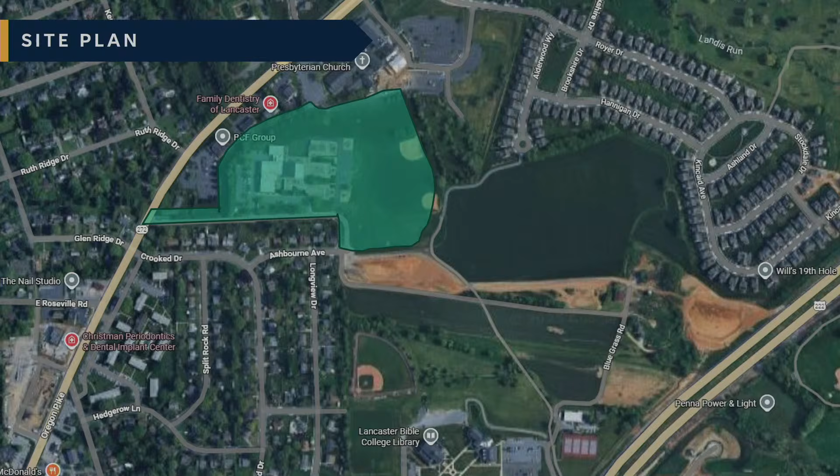Looking at the overall site plan, this is your existing site plan. The green space to the right, to the east, is your playground area and your fields. With the building itself, the three wings to the right are the majority of your classrooms. The three big boxes to the left are your gymnasium, auditorium, and cafeteria. In between is a mixture of classroom spaces and auditorium support spaces. You have your bus drop-off out front to the south, which is where your main entry is, and a car drop-off to the left of the existing building. So just orienting everybody quickly to the existing building plan before we go into the options.

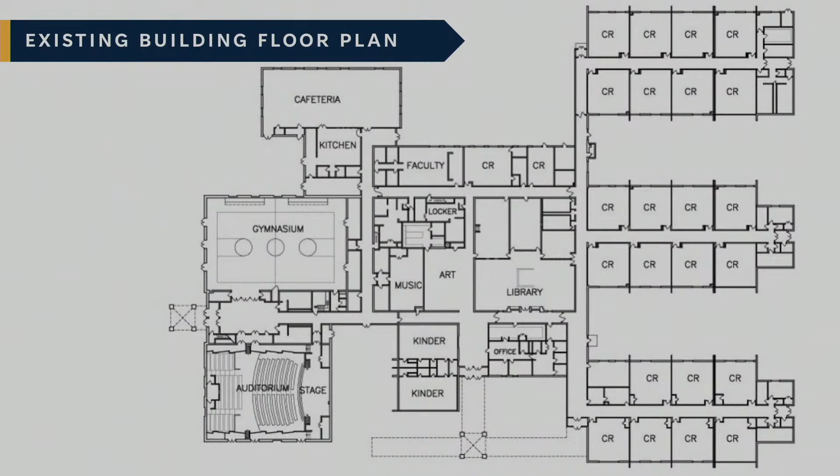Have you all seen the existing building plan option before? Previously we showed three options at the January 8th Facility Committee meeting and at the Town Hall: the addition and renovation option A, the addition and renovation option B, and the new option. So we are going to run through those updates with you tonight.

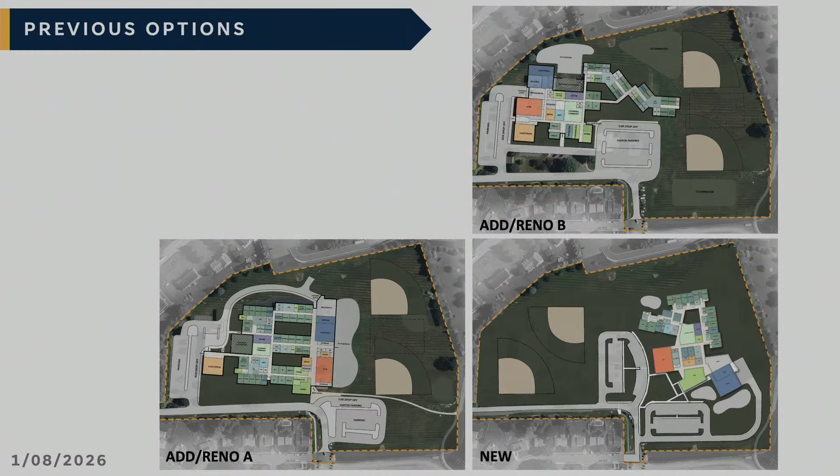So option A is the exact same as you had seen the last time. High level, just to review it with you: with option A, we are separating the car drop-off and the bus drop-off. The bus drop-off is going to be on the left, and the car drop-off is going to be on the lower right. Hold on here.

What that blue line indicates on that plan is where the new addition is versus the existing building. The dashed blue line that goes straight up and down on the page, to the right is new, and to the left is existing classrooms, and then we have two additions out beyond that. The intent of option A was to get the large box spaces that needed to be closer to the playground and the ball fields over on that side of the building.

Getting into this a little bit more in depth, we'll go to the floor plan in a second. This option is the only one-story option that we're conceiving tonight. We have an option B, which is a partial two-story building, and then the new option is a two-story building. This option maintains the auditorium. Although we have moved the cafeteria and gymnasium to the right side, we have kept the auditorium in its current place in this option.

So looking at the overall floor plan, what you're going to see with the yellowish orange dotted line on the right and the red triangle below that, that is the main entry coming into the building. This is your public area of the building. We tried to move the gymnasium and the cafeteria, the often shared spaces with the public, adjacent to the playgrounds and the playfields outside. Directly inside the door, we have the administration, counseling just around the corner and connected, and the nurse, which would be close to both the gymnasium and the playfield and playground.

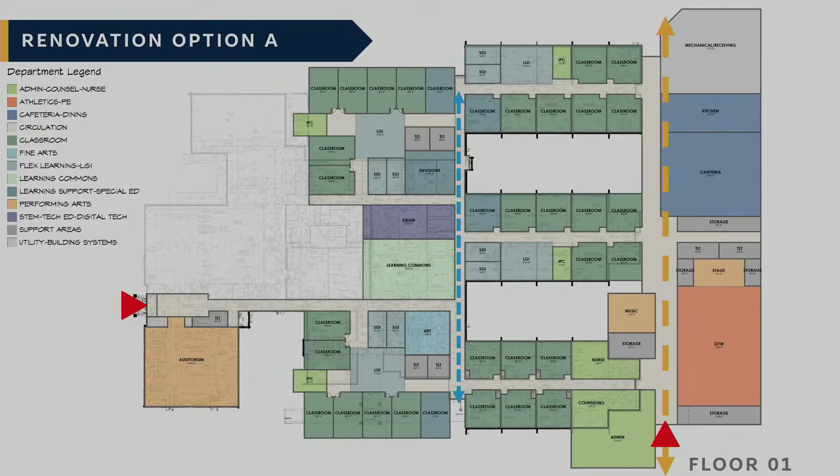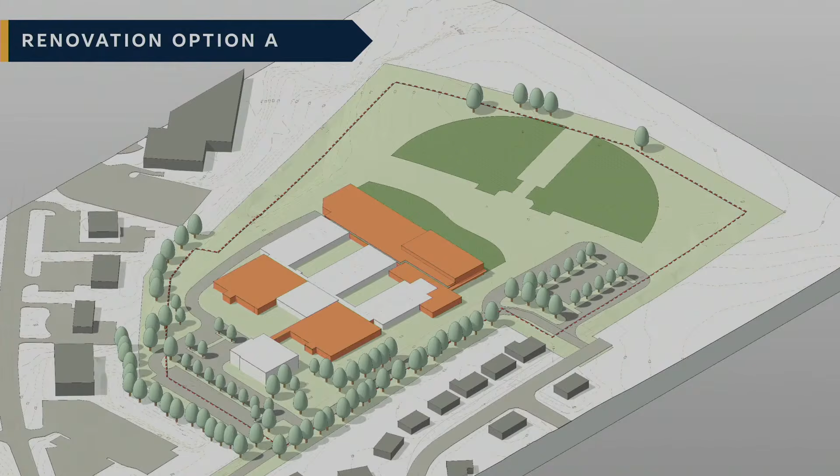Just looking at this from the aerial view, the orange is the new construction, the white is the renovated areas, so you can see that at a high level. The other part we want to talk about with these options is a schedule to get through design and construction.

The important part of this is because of your driveway that connects to Oregon Pike, and because of the work being done here increasing capacity, you're going to have to improve that intersection. That involves PennDOT, so that is going to be the time driver for this design and permitting schedule. Otherwise, you could probably get through this 6 months faster.

So we contemplated two different things: one, can we move the students out of the school to another place while this is being done? Or if that doesn't work, have temporary trailers to move students into. Both of those options did not work. There's additional cost to the construction number you're going to see at the end to make that work on this option, so this is not a highly desirable option because of the complication of getting through construction.

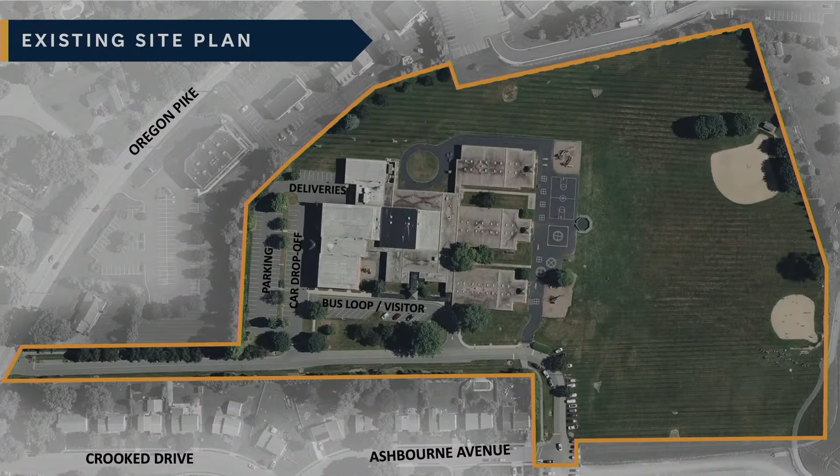Mr. Blayton will now discuss the additions and renovations option, option B. This one has been updated since the last time you saw it.

Thank you. All right, so as Chris said, we are going to discuss option B, and hopefully the first thing you see is that this looks nothing like, or not very much like, the option B you saw last time. There are some commonalities, right? But last time we looked at option B, this is the next iteration.

The last scheme had a classroom wing that was 2 stories, had 4 grades in it, but kind of snaked around the north side of the building to avoid those classroom wings, as Chris just discussed, so you could have students being educated in your existing facility while those new classrooms were built. But we agreed, as we approached the town hall, that even that wing kind of spread things out throughout the site for a 2-story scheme, right?

So we went back to the drawing board, as it were, to see where else we could place a 2-story classroom wing on the site. We looked at the existing roadway going in from Oregon Pike as part of your property, and as you approach the building, there's the existing bus drop off out front where your main entrance is. The more we looked at it, we wanted to test what it would look like to place a new 2-story classroom wing there, and that's what you see in this new option B scheme.

By and large, this new wing gets built first and avoids your existing academic spaces as well as most of your existing core spaces. Yes, you would need some temporary provisions, such as a different entrance while this was being built, but any phased construction has those sorts of accommodations to be made. So what you hopefully see in option B is a really nice compact plan. Where option A gave you brand new core facilities, option B gives you brand new academic facilities for your students in 4 grades: first, second, third, and fourth.

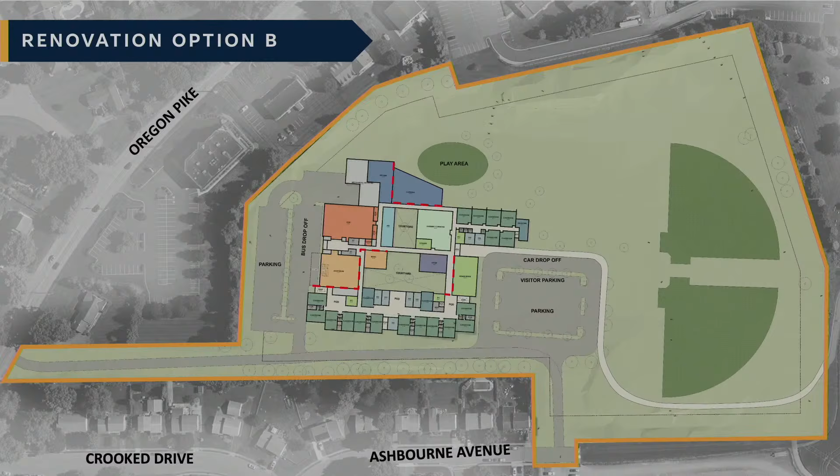That would be like a new wing - it would be fully renovated, with spaces the appropriate size for those programs. Think about your littlest learners being on a first floor adjacent to the entrance, the administration, and those shared core facilities - a really strong placement location. Now, there are some areas that are existing to remain, which we'll look at - you'll be able to see that on the 3-dimensional slide at the end of this presentation.

So this is an enlargement of that first floor plan. As Chris said, option A was the only 1-story scheme, but by virtue of this classroom wing, this is a 2-story scheme. That new wing provides spaces for 2 grades per floor with 2 learning communities or neighborhoods at either end of the wing, coming together in a common area in the middle. That's all located south of the common areas of the building.

This scheme also maintains the existing auditorium, the existing right-sized gymnasium, and learning common spaces. It does provide, as I said a moment ago, the new administration and front entrance to the building, but that also works in some areas such as courtyards into the existing floor plan through some selective demolition as the project would move on.

Plan north, we see those dark blue areas - that would be a reimagined, reconfigured kitchen and mechanical room, and then a new student dining area in that triangular piece on the plan north side. Again, that has adjacency to the courtyard to the south. Same with the learning commons, same with your STEAM classroom with the other courtyard and art spaces. So you get a lot of opportunities to activate those courtyards with programs from those adjacent spaces in the plan.

While it's not shown in the estimate we're looking at tonight, we do have some dashed lines that, should this particular option be forwarded, show opportunities with the clear areas on the site to expand the auditorium seating capacity, should that be a desire of the district or yourselves. But what you see colored in on the plan is what is incorporated into the estimates you're seeing this evening.

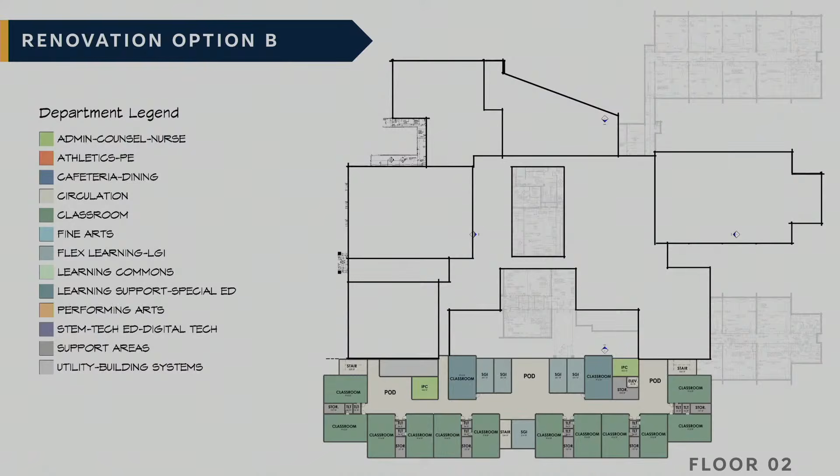Last but not least, we'll look at the massing on the site, similar to Option A. In orange shows the new additions occurring on the plan, and the white boxes show the existing portions of the building that do remain. This would be a phased construction project, with the new two-story classroom wings being constructed first to facilitate the moves of students.

Before I move on to the schedule, are there any questions regarding the plan or the site plan? Yes, please.

Just a three-letter acronym question: IPC, the little green square? Instructional Planning Center. We're good for putting acronyms on the plans without fully explaining them. So those would be faculty areas throughout the building, so that your educators would not have to go to the office or the library learning commons, for instance, to make copies or collaborate as a team. They have those instructional planning centers, and typically an adult toilet associated with those throughout the plan, just to facilitate their day and their schedules.

Thank you very much. You're welcome. Any other questions? Yeah, Mr. Rivera, I think.

Just a quick question: if I read that correctly, it says that you could potentially add 125 seats to the left of the auditorium. Would that then be able to house the entire student population?

I just want to verify with my team members here. Was that the intention, Justin? Okay. If that didn't happen, is there a place, like a stage in the gym or somewhere else, where all the students would be able to fit?

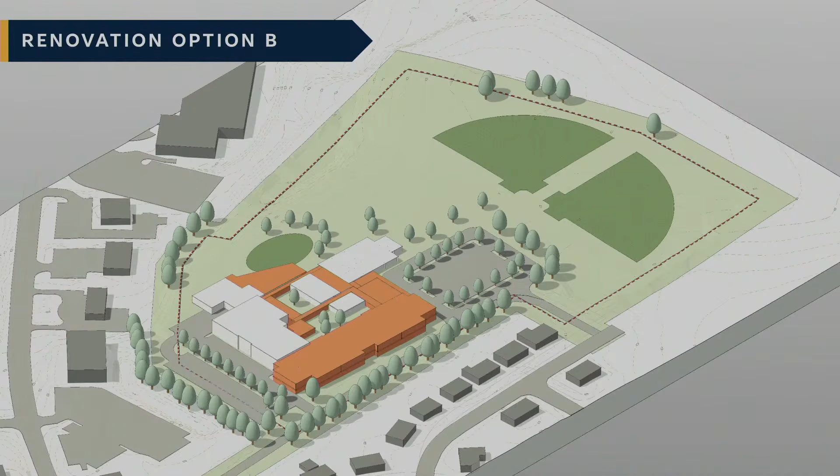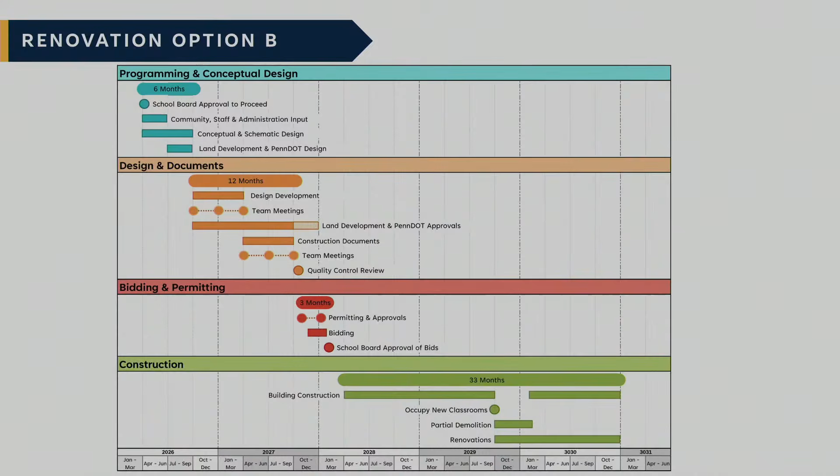So that's how it would potentially look on site, at least from a conceptual level. Should this particular scheme move forward, the schedule in blue, orange, and red is virtually identical to what Chris described with option A. It's really in the green, the construction phase, where there are differences, and that would be that you'd build first the classroom wing, but once that's complete, that's when you have a shift within your student body to those new spaces. Then there are different phases of construction that complete the project.

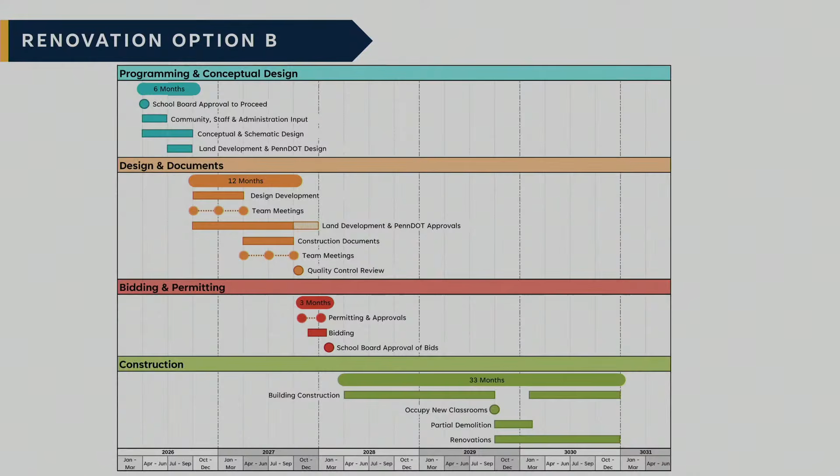Where on option A you saw the necessity for some temporary classroom spaces, with option B you're building those classroom spaces that students then shift to as certain areas of the building are demolished or renovated, giving you a complete holistic project. That's probably the biggest difference between the two from a timeline standpoint. Yes, sir, I just want to clarify that the last phase of the project is not going to take over a century.

Well, it goes from 2029 to 3030 and 3031. So I just wanted to make sure, just so to clarify for our viewing public, that it's not going to take a century. We always say that we are building for the future, sir. We are really good at future planning. Thank you so much for pointing that out. You are obviously 120% correct there. This would all happen within this century. So, thank you.

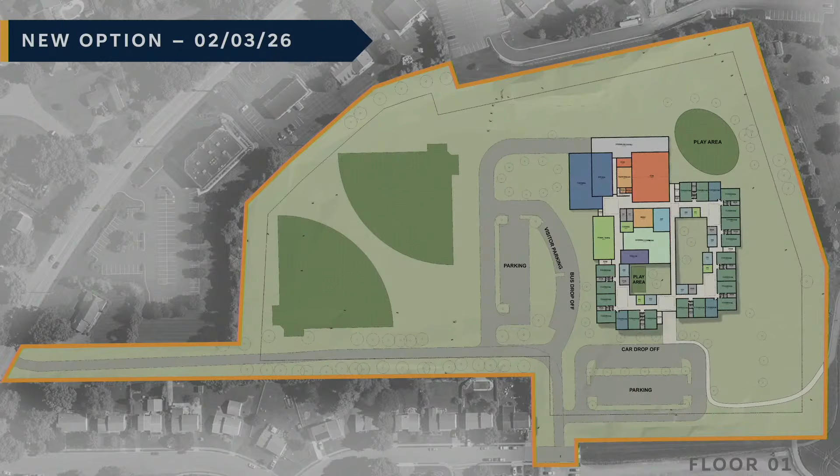Zooming in a little bit closer on the plan, if we start on the left-hand side and work our way to the right, in the middle there is an admin piece where we're nice and center, right off of the bus loop there on the left-hand side. So that would be one of the primary entries to the plan.

To the bottom and wrapping around the right-hand side would be the 3 learning communities here on the first floor, and the opportunity we'll see in a little bit to stack 2 more off of the back side. This will also show the flexibility and additions in the future should the need arise.

But if we look at admin and move directly to the right, that would be your learning commons right in the core of the building, equally accessible from all of the learning communities, tethering that with STEAM as well, and giving them the opportunity to have outdoor space directly adjacent.

If we look a little bit closer at the learning community in the bottom left-hand corner, thinking that could be the littlest learners as well as Envisions. They're adjacent to the admin, but also giving them access to a courtyard that would be private, enclosed, safe, and seem to make some sense as well with that.

We are showing not only an entry on the left-hand side, but if we think about car drop-off on the plan to the bottom, that would be the entrance, and really that spine that we see, that corridor moving up to the right of the learning commons.

Again, making sure that circulation, once you're in the building, it's easy to get where you're going, streamlining students' navigation as well. Using the same color coding, we're seeing the public corridors there, not only behind admin, reaching up to cafeteria, across to the gym, and further towards the first learning community, but then the private corridor as well in the blue.

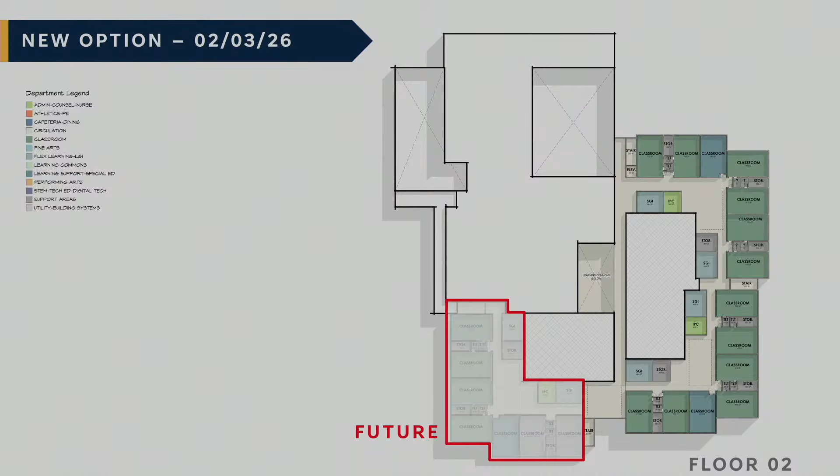Moving up to the second floor, this shows the potential for maybe that future expansion and building that into the project at this point. So we're really only needing 5 of those groupings right now. But if we were to envision that bottom left-hand corner, structuring that in such a way that an addition, although disruptive in the future, gives you the potential of expanding on-site without expanding your footprint out.

And then from a massing standpoint, looking in at the two courtyards in the middle, both serving the learning communities as well as the learning commons, and then showing how the two-story pieces wrap around from the south side as well to the back.

Any questions on this one before we move to schedule?

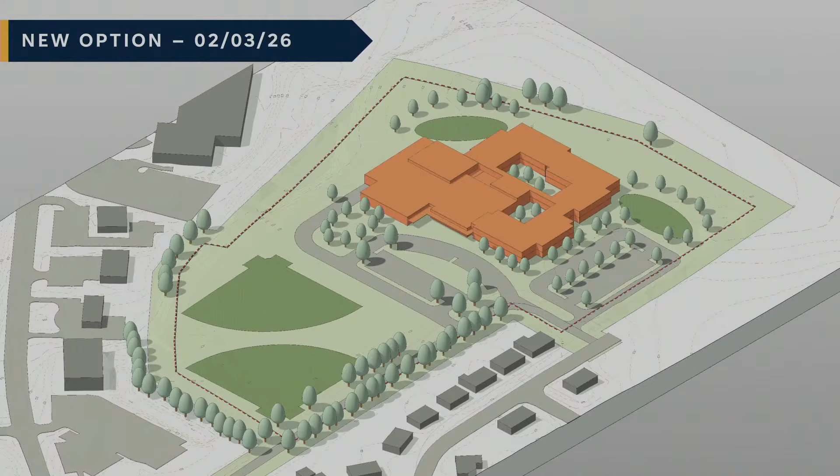Yes. You mentioned 2 entry points into the building. So a parent parking in that lower end, would they not have to walk around to go through the office? They would. At arrival point in the morning, you'd have bus and car loops separated. Likely during the day, you would have parents parking for incidental uses at the bus area and then through the admin area for that secure entry.

I guess no one else. I was going to ask, are there any zoning or sightline proximity to property line implications of shifting the building there, or are we all clear on that front? We're all within our setback and by right.

Okay. And then, I mean, I guess I'm a little out of my depth in terms of this, but I was trying to think about it. From what I can tell, it looks like the academic wing would receive natural light in the morning if I'm doing my calculations correct. So I'm trying to think if there's any opportunities—is that a thing, or is that just something that came to my mind that's non-sensical?

Nope, it's absolutely okay. Students' access to natural light and seeing that circadian rhythm cue throughout the day is absolutely a priority of ours. So you would have the sun rising from the right-hand side in the east and setting in the west on the left-hand side. But making sure, if we look at the actual learning communities, we are continuing that notion of the primary instructional spaces being around the outside, and then inboarding the small group instruction, some of the support spaces in addition to the corridor. We see in the bins or the nodes that open opportunity for collaboration, large group instruction with each community as well. So that would have light flowing in from the courtyards throughout the day as well.

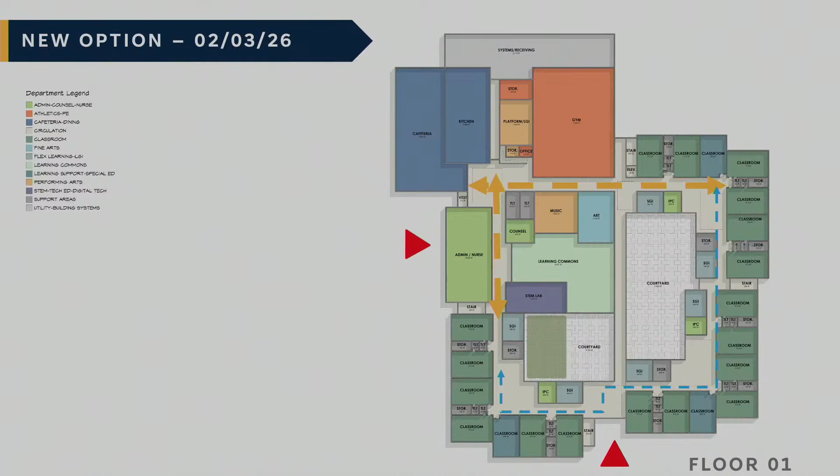I want to go back to the gymatorium idea. What is the current feedback on gymatoriums? Because I know right now in Nitra we use the gym and the auditorium at the same time sometimes, so both spaces are occupied throughout the week at the same time. So I'm just wondering how likely it is that we can meet the needs in a gymatorium.

So as we said, most of the new buildings or additions or renovations we do now is a gymatorium. And there's a couple ways to address that. The gym's big enough to get the whole class in there and flexible to move around. That gym is also big enough that you could split it in half. So what we're trying to do is give you as much flexibility with that space as possible. You could split that into 2 gym areas—one could be used as gym, one could be used as indoor recess during inclement weather. You could open up the whole space and use it as a gymnasium or as an auditorium. What you're getting to is when you have conflict in schedule.

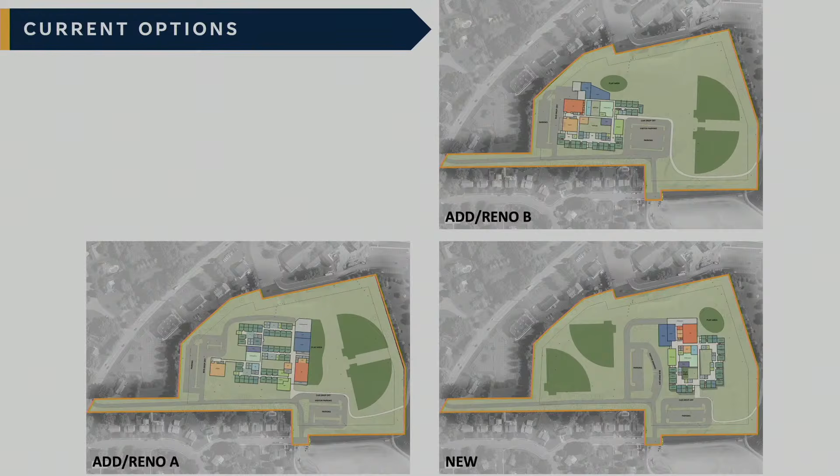Okay, so last time we talked about, if you remember, we went over the priority, the MoSCoW list, to prioritize your goals, wants, and needs. We took that and turned it into a priority matrix. That was built through the survey we had in the beginning, the steering committee, the town hall, the facility committee meetings, to develop that priority list.